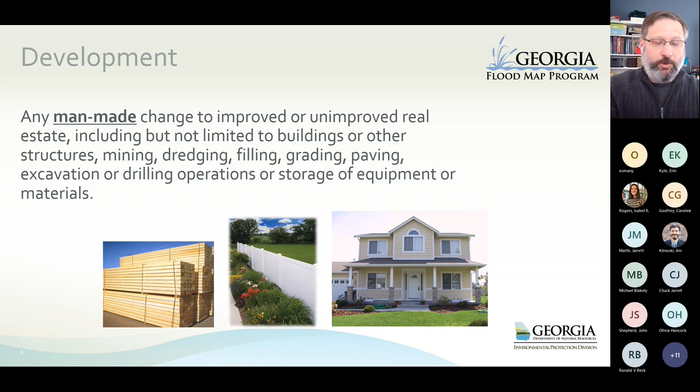So when you see a floodway on your map, that's what it is. It's basically how far in you can encroach without getting into the floodway, and the channel will still be able to convey the flood water without increasing the water surface elevation by a foot. Off to the sides of the floodway, but still in the floodplain, you have what we call the flood fringes, and I may use that term a few times.

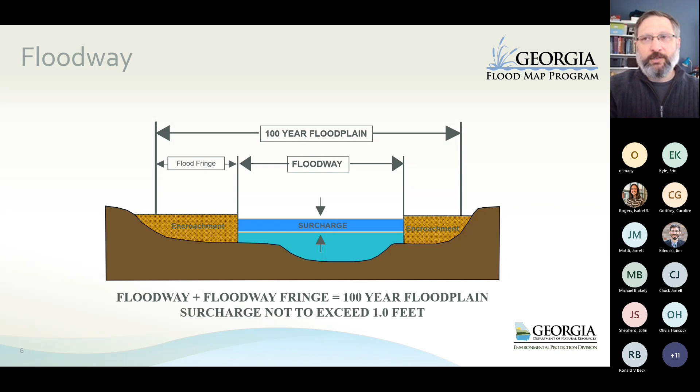So this is what a typical cross section would look like. So when we're talking about this, you can kind of keep this in the back of your mind. What is the NFIP requirement? Because as FPAs, the community says, well, as joining the program, we'll follow all the rules and the regs. What do the regs specifically say?

Well, if you look at section 60.3, paragraph D3, you'll see that it says the community shall prohibit encroachments within the adopted regulatory floodway, showing that there will not be any increases in flood level. And of course, it says some other things in there, and we'll go through that. But that is the gist of it. You are to make sure there's no encroachments in the floodway causing a rise, any increase in flood levels.

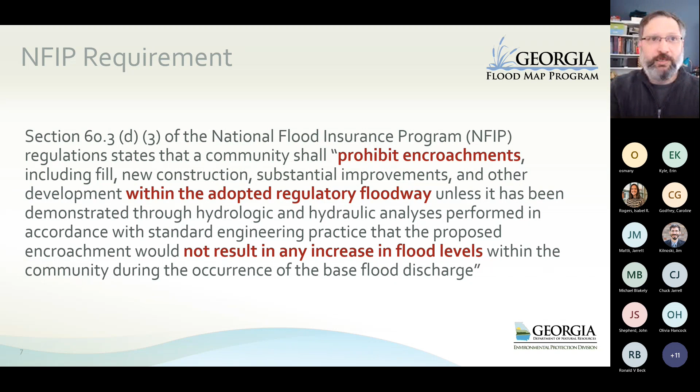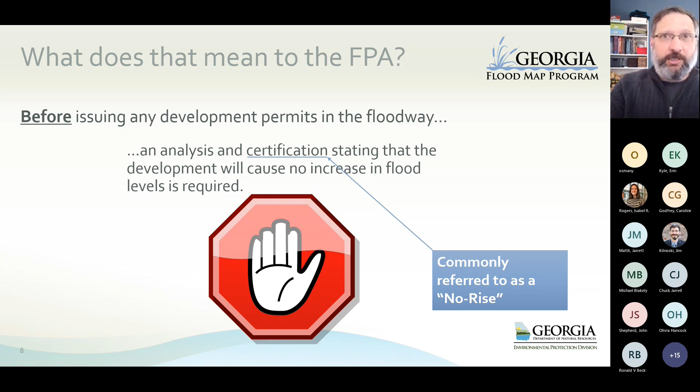So what does that mean to the FPA then? Well, this all happens before you issue any development permits in the floodway. You need an analysis and certification stating that the development will cause no increase in flood level. Basically, that certification is what we refer to as the no rise. So when someone says, what is a no rise? Well, it's just a certification. It's a piece of paper. It has a certification on it, has some signatures. It says there's no increase in flood level due to the project.

You need engineering analysis proving that there's no impact based on that proposed project. And that impact can be in base flood elevations, in floodway elevations, and floodway widths. That floodway widths gets people sometimes. Communities don't realize that, and they end up with a violation. So it's all three of those things we'll be checking for. That certification needs to be certified by a professional engineer. And again, you have to do all this and issue this certification before you issue any permits.

You keep those no rises in your file. You don't submit them to FEMA because there's no impact on the maps, right? No rise, no impact. So FEMA doesn't need the information, but you'll need it because when we come around for a community assistance visit, we may ask to take a look at all those no rises. And if there's ever a problem down the road, you'll want to have that on file. And believe me, we see that quite often around the state where no rises weren't issued or it isn't clear if one was issued because we don't have a record of it.

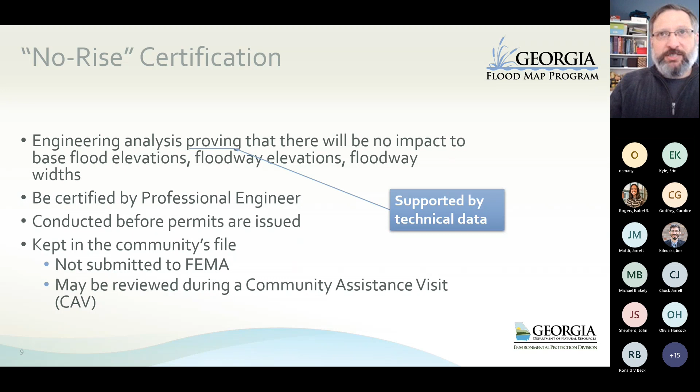This engineering analysis, when I say proving, I mean it's supported by technical data. So what does that technical data look like? Well, let's start at the very beginning. If you have a map and it has a floodway on it, there was an engineering model that was used to create that floodway. That engineering model is known as the effective model. The requester or the developer will be modifying that model to show pre and post project conditions. You are going to be comparing the pre and post project models to verify that there's no increases in BFE, floodway elevation, or floodway width. And again, we're going to cover this stuff several times, but I want to get the definitions out there.

If FEMA gives you an effective model, let's say it's done in HEC-2, which is a really old and outdated model that no one uses anymore, you're allowed to take that and rerun it in, say, HEC-RAS or some other model, as long as it's calibrated to the FIS profile to within a half a foot everywhere along that profile, and that model's FEMA approved. You can get a list of the FEMA approved models. I would say 99% of all models in riverine areas are HEC-RAS nowadays. It's pretty much the gold standard.

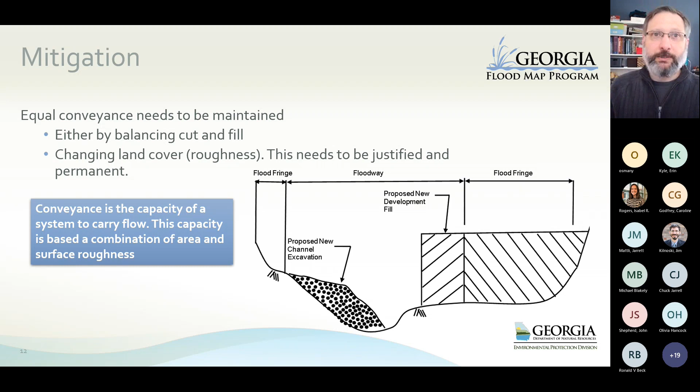And probably you can do something like put proposed additions in those areas, and it won't cause an increase. And that's fine. Now, that doesn't mean that they say, well, we're building this just downstream of the existing structure, therefore it's a no rise. No, they still have to go through this no rise process. But I think that's another way in which people have shown that they're able to do a project and not cause an increase.

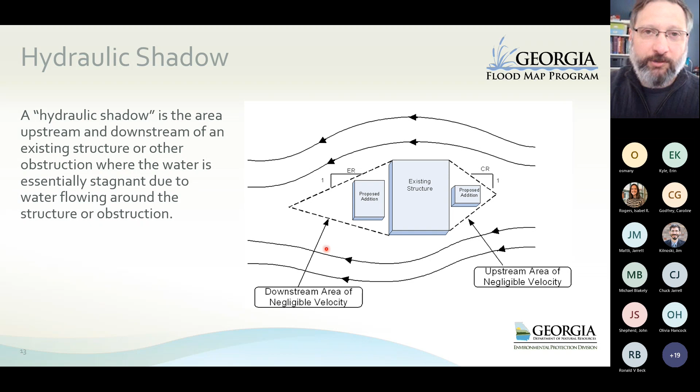The thing you want to watch out for when you're doing a structure or some work in a hydraulic shadow is that their models have cross sections running through that shadow, so you can get an accurate determination of what those impacts are, if any, if that makes sense. Turn off my laser pointer.

First poll question. So this is where it's going to pop up somewhere for you in your chat, but let me read this off, and Jim, let me know. I can't quite see what's going on. I'm not sure where to look. Is the poll question up? Yes, the poll question is launched. Let me read this to you.

So, which of the following would be considered a floodway encroachment? A, a new culvert placed in a channel. B, a new bridge that spans the floodplain. C, new grading in a subdivision that places fill in the floodway. Or D, A and C only.

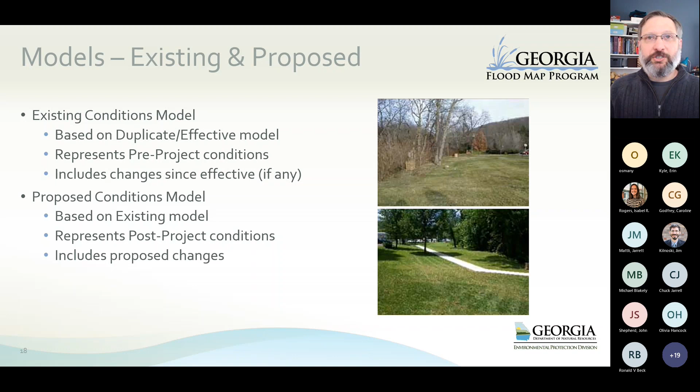The proposed conditions model, you take that existing conditions model and you put your project in there. So you start modifying the cross sections, show cut and fill and structures and whatever else is part of that project.

Before I slide on to the documentation, let's just go over that modeling again. You've got your effective that comes from FEMA. You've got your duplicate effective, which is basically them just running it on their own machine to make sure they're getting the same answers that the effectives got. The corrected effective, where you add some cross sections and potentially correct any errors.

Existing conditions, where you would update it based on exactly what's out there right now, using better LiDAR, let's say, better topographic information, survey, that sort of thing. And then you do your proposed, which is where you're putting your project in the model. So those are the models, and we'll hit that again here in a minute.

Documentation. So you should be getting a report. If somebody wants a no-rise, they need to be submitting a report to you. Now, here's a list of things that should be in the report, but this isn't necessarily all-encompassing. If you look at that last bullet point or checkpoint there, anything you feel you need to do your no-rise review, you should ask for.

I'd say a lot of engineering firms do a fairly good job of putting all the information you'll need in there. But just make sure that it has it. You'll want to know what sort of procedures they did, what they did to the models. You'll basically want to see some sort of comparison between the effective, the existing, and the proposed results. Some sort of map that would probably look something along the lines of this.

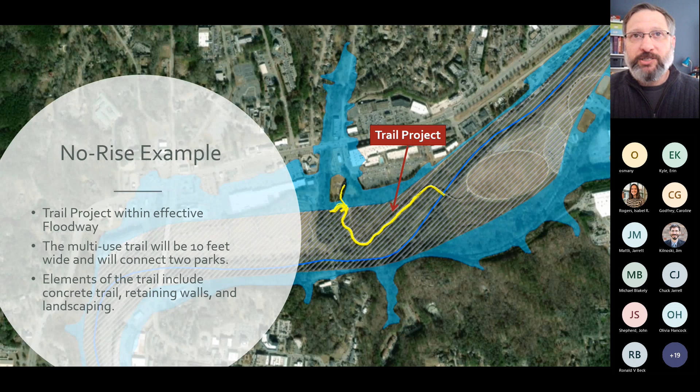So taking a look at it, they got the effective model. So here's the stretch of stream. These three cross sections, Q, P, and R, are the three cross sections for that area in the effective model. You can see there's a floodway. You saw from the previous map that they are definitely going to be doing work in the floodway. Any work is an encroachment or considered development. So the effective model has these three.

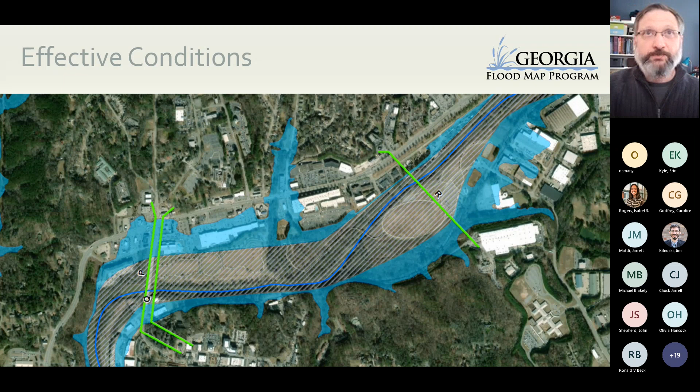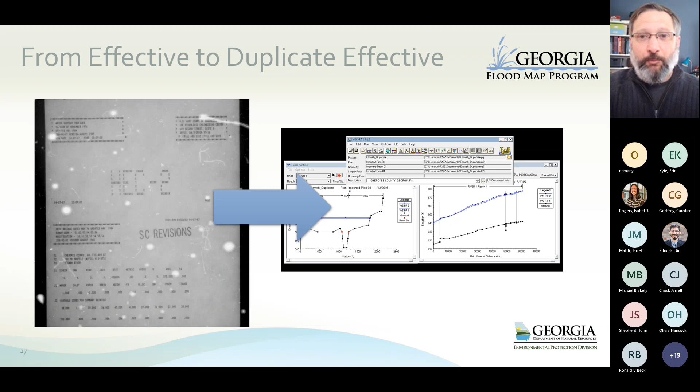The first thing that you do is you take that effective model and you look at their duplicate effective. In this case, they went from HEC-2 to HEC-RAS. Now, I can tell you from experience, when you take an old HEC-2 model that you're only going to get a PDF of and you input that data in HEC-RAS, you're going to get different results, mostly due to the fact that HEC-RAS has an updated methodology for computing. It basically computes the water surface elevations in a different manner, and that's fine. But remember, what they have to do is replicate that effective model within a half a foot.

Now, to get these, they may have had to change things in the HEC-RAS model. Maybe they played around with Manning's n values, little tweaks here or there, little tricks that engineers can do. Basically what you're trying to do is calibrate your duplicate effective back to your effective model. That's absolutely fine. Just read the little section where they said it. If they're making little tweaks to some of the parameters, that's absolutely fine. If you have a question on it, you can ask them, but that's typically what you have to do to calibrate the models. Hopefully that makes sense because we get that question a lot.

So now you have your duplicate effective model. It's time to get your corrected effective model. This is where you're going to add your new cross sections. Our trail was running through here, if you remember. Therefore, we need to put some cross sections in there. Otherwise, you won't be able to analyze anything because the only cross sections would span the project. Of course, it would have no impact because there's no cross sections. You want to make sure they've added cross sections through their project area. Make sure they've added enough.

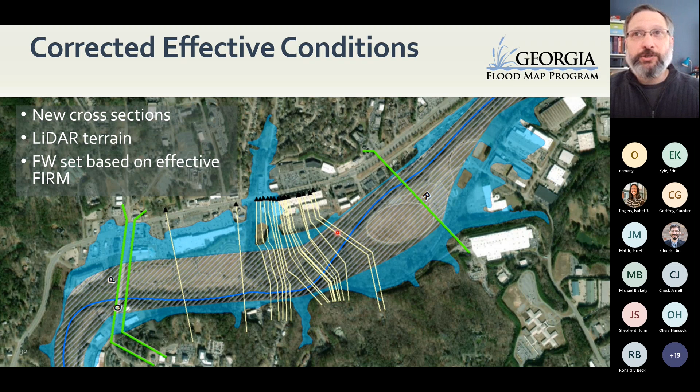So when I said the existing conditions is where you add any changes that happened since the effective model, this is it. Now, if somebody built that pedestrian bridge after the effective model was done, that could be a problem, and I hope you can see this point. If, let's just say, that was built 10 years after the effective model, well, it should have a no-rise attached to it or a LOMR or something to that effect because work was done in the floodway. But if it was built before the floodway was first put on the map, and it just didn't have a cross section running through it, they can add it to the existing conditions model, no problem.

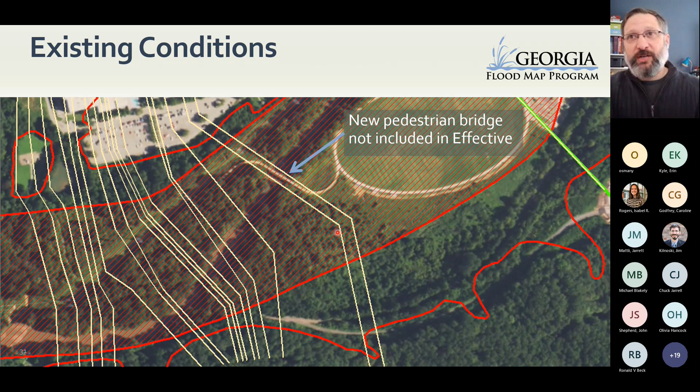And if that trips anybody up, please ask a question at the end, because we do run into it. While the requester wouldn't be dinged for this necessarily, the project would be stopped and the community would have to deal with that potential violation. And nothing would be done in there until that got fixed, and that could take a while. But in this case, it's there. It just wasn't modeled because they didn't put any cross sections down there. So we need to add that to our existing conditions model.

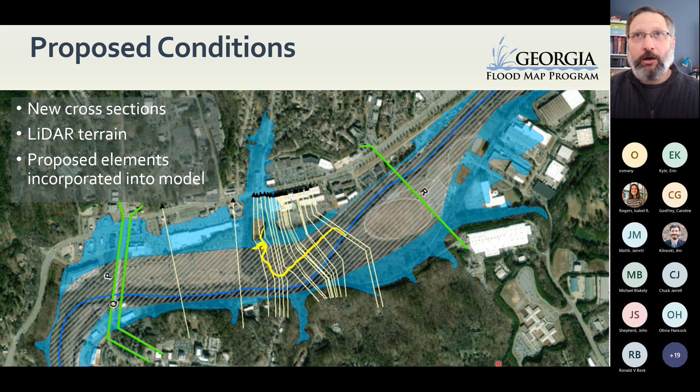So here's what our map looks like. The proposed conditions model, we already have the new cross-section locations. We already got that bridge in over here. Now we just need to put the proposed elements in. So remember I said something about a retaining wall. You'll want to put in that new concrete trail itself. I said there was going to be some landscaping in there that'll have impacts to the Manning's roughness coefficients. That's where you would start changing those up. Basically get all those elements into your proposed conditions model.

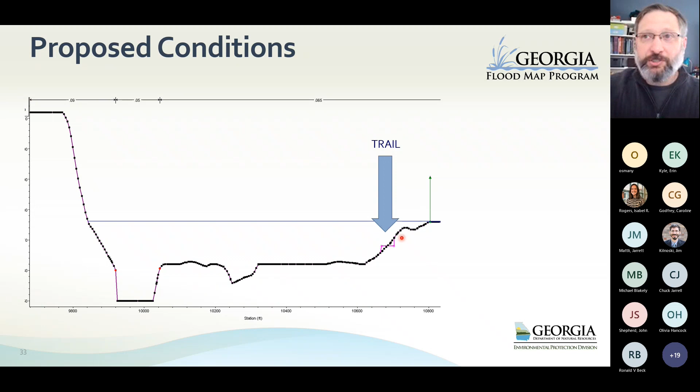I kind of threw this in. This is a typical cross section for this project. It's probably hard to see, but there's a little magenta line right here. This is the trail, and you can see this little piece here. We're cutting out part of the cross section, and over here we're kind of adding some fill in. So this would be the fill. This would be the cut that's kind of offsetting it, in this case, the mitigation factor of it. This is just one cross section. Of course, it would translate through all the cross sections that the trail touches, but that's kind of what you would see there.

Hopefully, if you got a project, they're going to send in some plans that kind of look like this. This may enhance your understanding of the project. We have that 10-foot wide trail. We have 3-foot shoulders on either side. You can see they're planning on doing concrete. These sorts of things you want to make sure you have, just make sure you understand what's going on. But you would probably need those for permitting anyway.

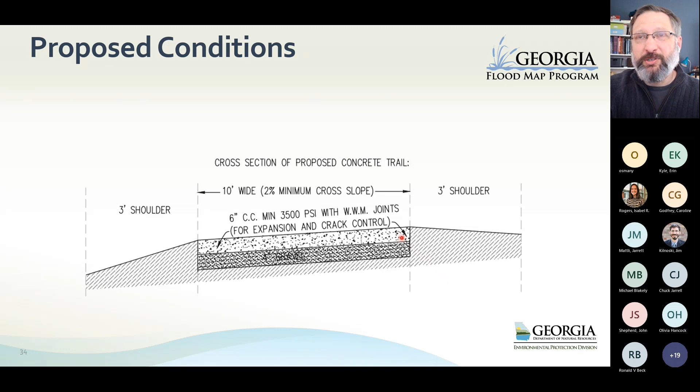So you look at your table and you see that there are no increases. You didn't find any errors in the model. They submitted the report. You got the certification. You can feel confident and issue that no rise. You can then start working on their permits. You can take that no rise, stick it into your filing cabinet, or however you file those things. And when we come to visit, we may ask for them, and you just pull them out, and that's that. You're good to go.

So I just want to wrap it up real quick. I went through this quick because I really wanted to leave some time at the end in case there's any questions. But a quick summary: a no rise is just a term that says that you're doing work in a floodway and you're causing no increases. Communities are responsible for reviewing and maintaining this documentation. Not all projects are no rise, and that's absolutely fine. You can do work in a floodway and cause an increase as long as you go through the conditional letter of map revision process and get FEMA's approval. And there are some steps they have to take to show why it's a good idea to let that project go ahead, even though there's some rises.

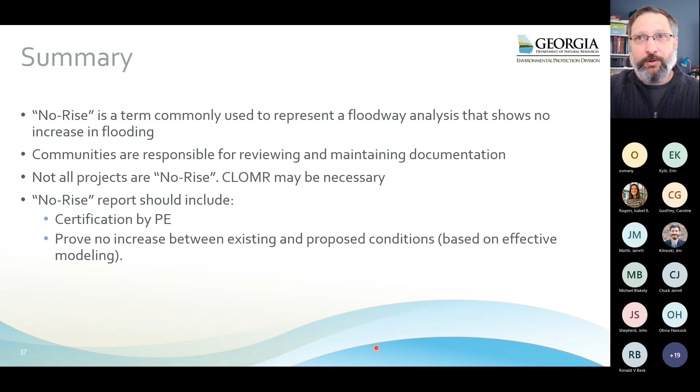But as long as you know the process, keep this handy when it comes to you so you can kind of go through those 8 steps. And if you do that, then you're well ahead of the game, and you're probably okay.

Open it up to questions before Emily gets over this last slide, I think. So you can drop some questions in chat or come off your mic and ask, I guess would be fine. Am I saying anything wrong there, Jim? Nope, that's exactly correct. All right. Fantastic. I do have a question I wanted to throw out at you, since we're waiting for folks to put questions in the chat.